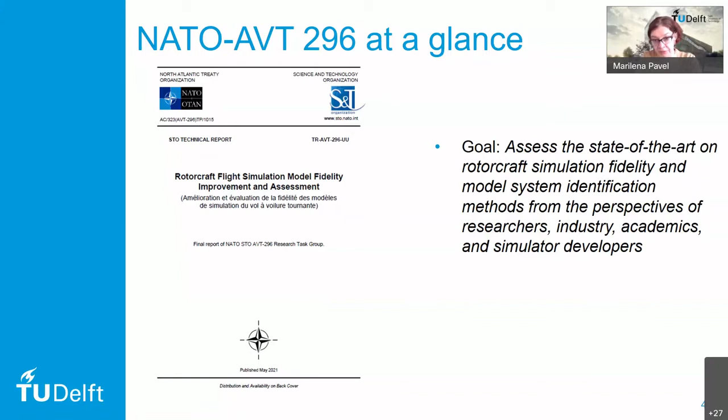Simulation fidelity: the work we did was mainly related to simulation identification, mostly in the frequency domain. We had 7 different methods, as you see in this enumeration, and a flight test database of 8 different helicopters — the Bell, the UH-60 Sikorsky, and the CH-47 were amongst them. The first 2 methods, gain time delay corrections and the black box input, were more non-physical identification methods.

The next methods, 3, 4, 5, and 6, were physics-based models — Liverpool, for example, discussed forces and moment increments based on stability derivatives. Finally, method 7, the stitch simulation, was performed by DLR and Dr. Tischler.

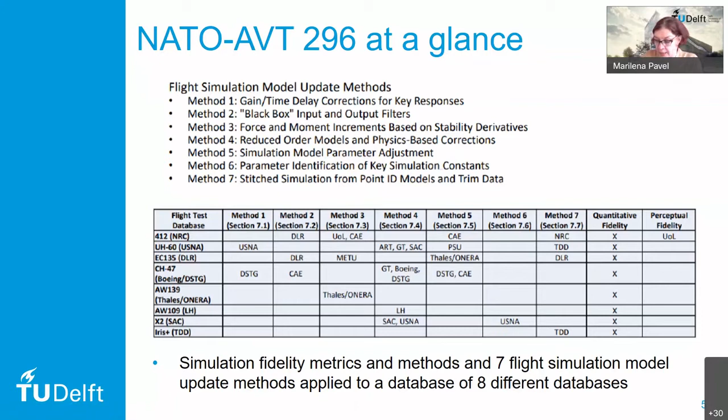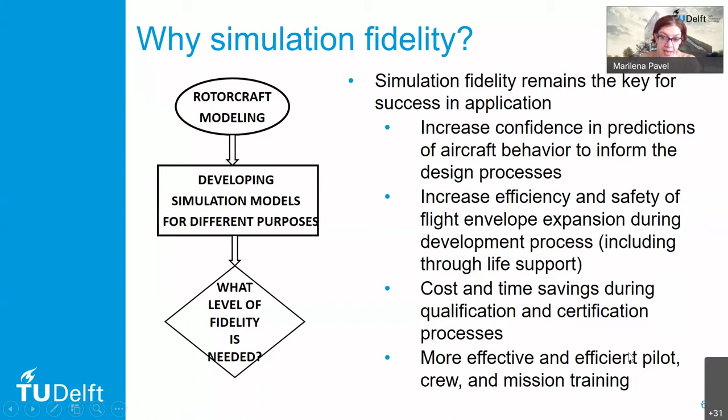So why simulation fidelity? We are modeling the rotorcraft, or the vehicle, and because of this we develop simulation models for different purposes. The first question is what level of fidelity we need. We need simulation fidelity to increase confidence in our predictions, to inform the design process, but also to extend the safety and flight envelope expansion. We need it to reduce costs and save time, and of course for more effective and efficient pilot and crew mission training.

When we go to the simulated world, we can say that according to the task being performed, the pilot is trying to simulate, to fly in a simulator, a certain task. So the first thing is that in a simulator we are performing according to a certain task.

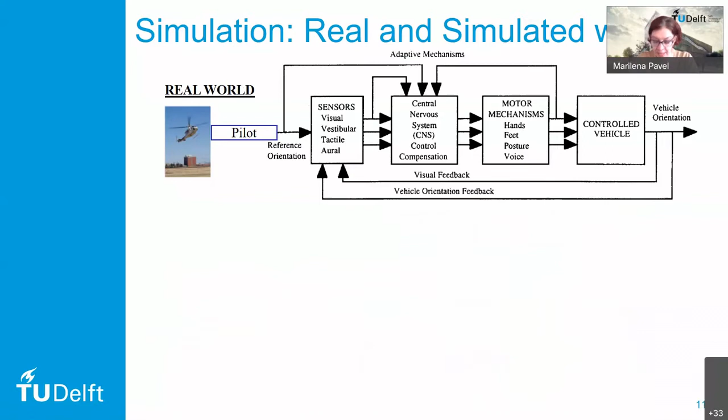And finally, we can discuss the behavioral fidelity, which is an integrated effect between the subjective and the objective fidelity.

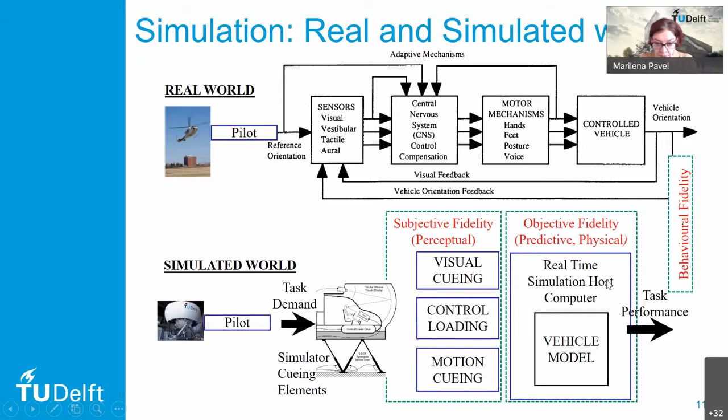I would like to underline that in the fixed wing world, there are more definitions of fidelity. We work as well with the so-called environmental fidelity and the equipment fidelity. The environmental are the cues due to flight, and the equipment are the cues due to the simulation hardware.

There must be a trade-off between the environmental cue fidelity and the equipment cue fidelity. So in a training simulator, we have a high level of environmental cue fidelity and equipment cue fidelity. For research simulators, which can be used for assessing new designs, we can think of a high environmental cue fidelity and less equipment cue fidelity.

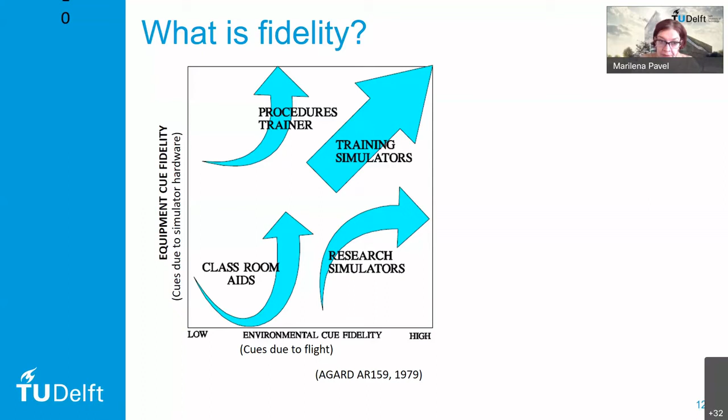The procedures trainer can be used for training pilots. Here we need lower environmental cues, but higher equipment cues.

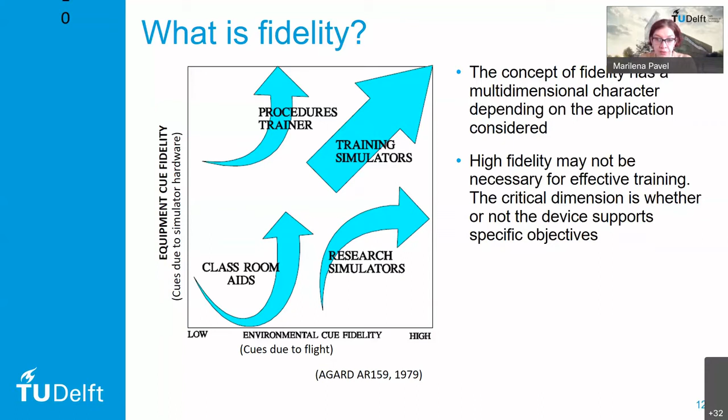So the concept of fidelity has a multidimensional character, and it depends on the application we are considering. High fidelity may not be necessary for effective training. The critical dimension here is whether or not the device supports the specific objectives.

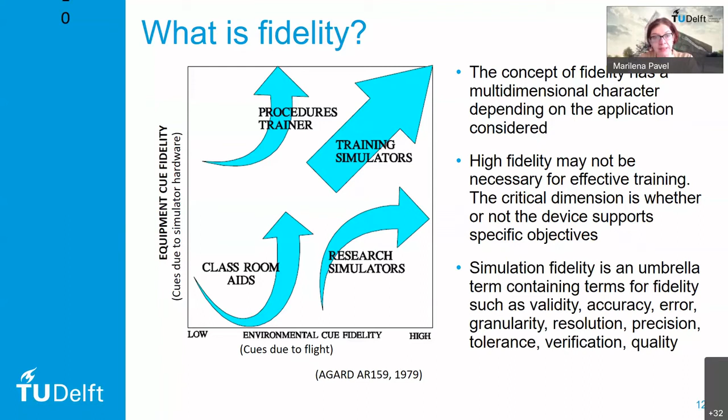The simulation fidelity is actually an umbrella of terms which contain many terms like validity, accuracy, error, granularity, resolution, precision, tolerance, verification, and quality. So fidelity is quite a challenge to think of.

In the fixed wing world as well, there was a working group on Fidelity Implementation Study, and they realized that going from the reality to the model, one needs to have one step in between, the so-called referent. They say that the referent is an entity or a collection of entities and conditions together with their attributes and behavior, which are present in a given domain.

It is said that trying to assess the fidelity straight related to the reality would be too intricate a solution. This is why we need to go to this kind of referent term. Using the concept of referent, we can simplify the fidelity measurements and go through that to assess the reality.

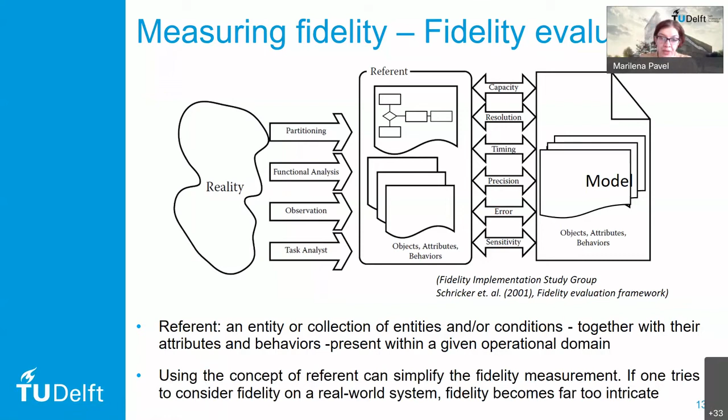Going on to simulation motion perception, we had in the NATO group a special section dedicated to motion perception. Why? Because motion is a kind of holy grail for simulation fidelity.

We all know that we assess the motion, we perceive the motion with our vestibular system, which is formed by the semicircular canals, which sense angular acceleration, and the otoliths, which detect translational acceleration.

One should think about how important motion perception is. This question came up in the group already.

One should understand that from an experiment in Simona, the simulator in Delft, we understood that motion perception has a lead with respect to the perception of the visual.

So what you see here is the roll rate in an experiment, and the continuous line is the stimulus, the roll rate. You see here the semicircular canal response and the visual channel response. So contrary to what we think, the first thing pilots do is perceive this motion, then the visual cues. In this experiment, the lead was about 300 milliseconds.

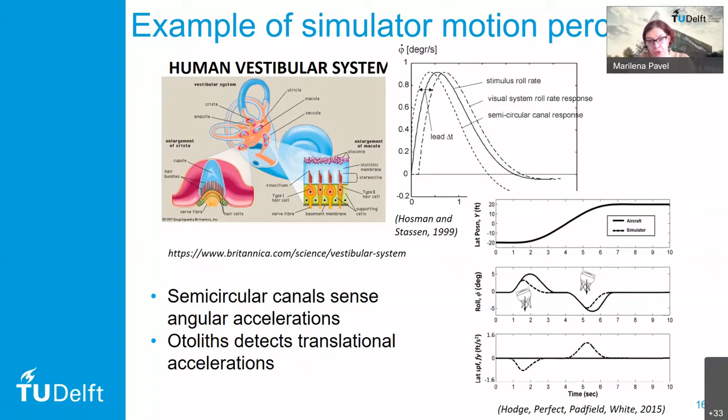So going to understand the motion tuning criteria, mostly we have criteria concerning motion. The most known are the so-called Sinacori criteria, developed in 1977 and extended in 1999 by Schroeder.

Sinacori realized that we can assess the perception of motion by analyzing the motion at 1 radian per second. And he developed a rotational gain and translational gain as a function of the phase error, across 3 different fidelities.

High fidelity, where the motion sensations are close to those of visual flight. A medium fidelity, where the motion sensations are different and noticeable, but not objectionable. And the low fidelity, where differences are noticeable and objectionable.

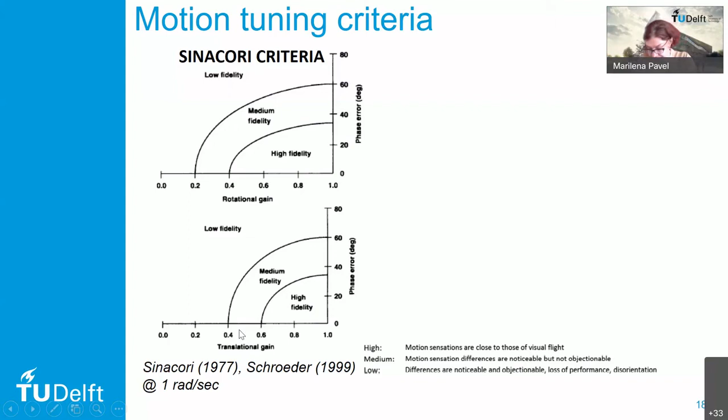It was also understood that these criteria actually have little or no support other than intuition. So they are quite subjective, but up to the present, these criteria are the most used in the research. In the fixed wing world...

there was the so-called Objective Motion Cueing Test, the OMCT, which was introduced in order to eliminate this subjective character of motion tuning. The OMCT actually excites each degree of freedom at frequencies between 0.1 up to 16 radians per second.

For example, you see an experiment in Simona where the OMCT is assessed for surge motion. The different frequency response of each degree of freedom is determined, and also in the test, the important relation between the input and the output response of the motion is determined.

The OMCT was introduced in the fixed wing world in the ICAO 9625 documents, and it is used in the present for motion tuning.

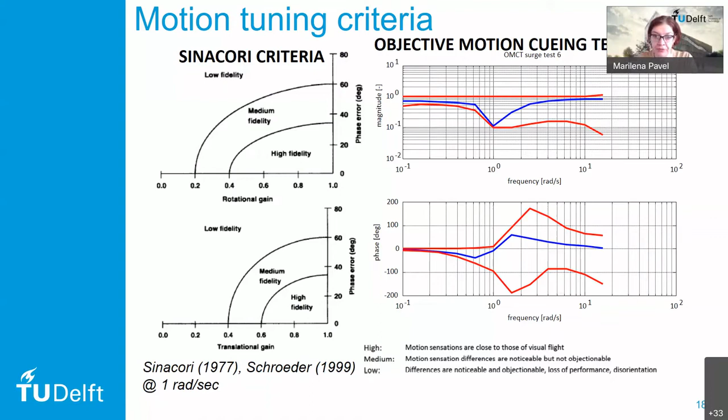Going to simulation qualification, of course we know that the FAA and EASA have the so-called objective qualification and subjective qualification. In the objective qualification, there are areas where the so-called performance tests are made, handling qualities tests, and trajectory tests.

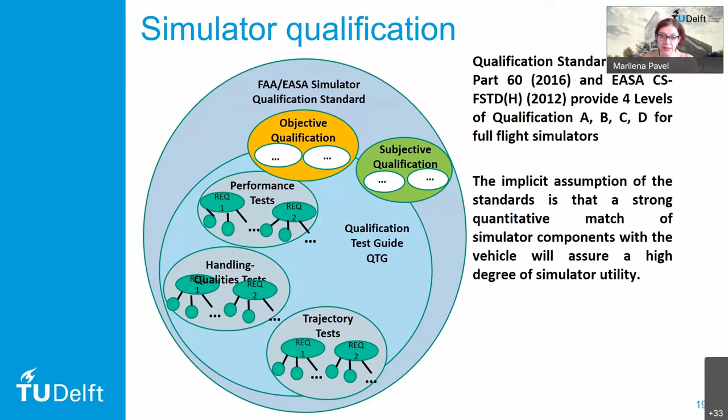Those are all qualification test guide criteria. And the implicit assumption of these standards is that a strong quantitative match of the simulator components with the vehicle will ensure a high degree of simulator utility.

Efforts in EASA are made to change this assumption, and this is, for example, in the ICAO 9625, which acknowledges that if all these are fulfilled, this still does not guarantee fidelity.

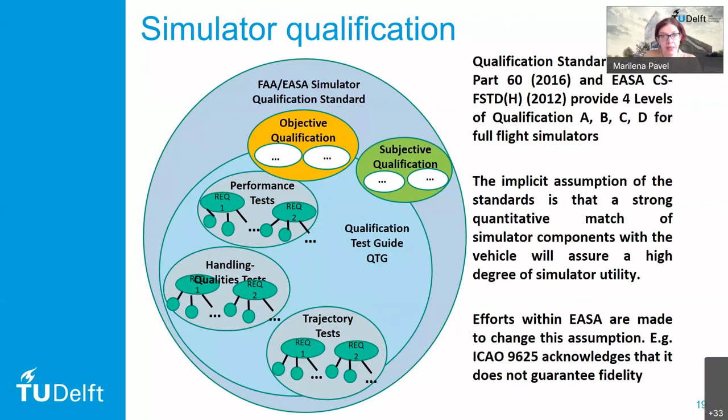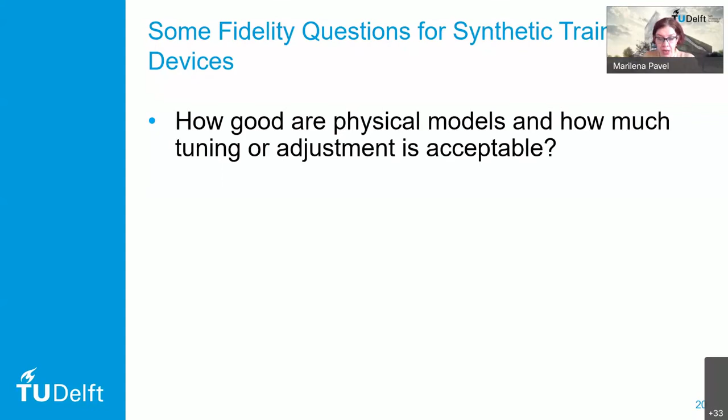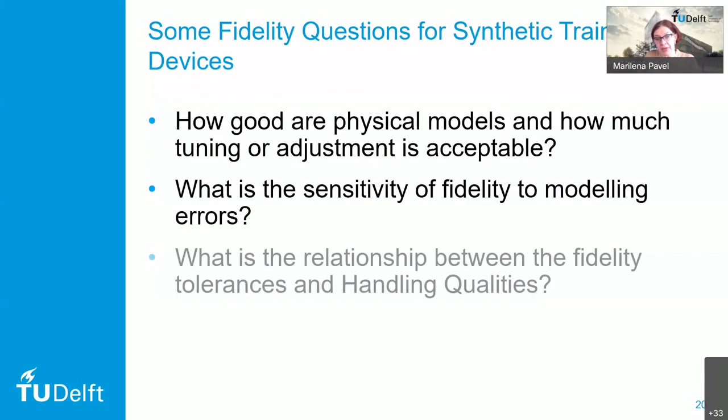So in the previous work that we have done on the fidelity question, we tried to understand how good the physical models are, and how much tuning is acceptable. What is the sensitivity of this fidelity to modeling errors? What is the relationship between fidelity, tolerances, and handling qualities? And what is the sensitivity of the pilot control strategy to this fidelity?

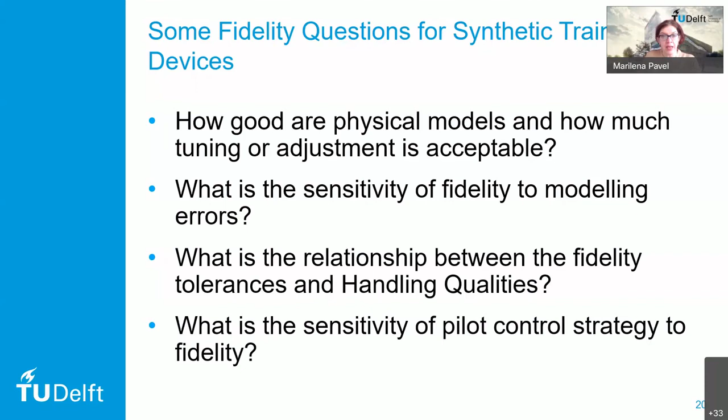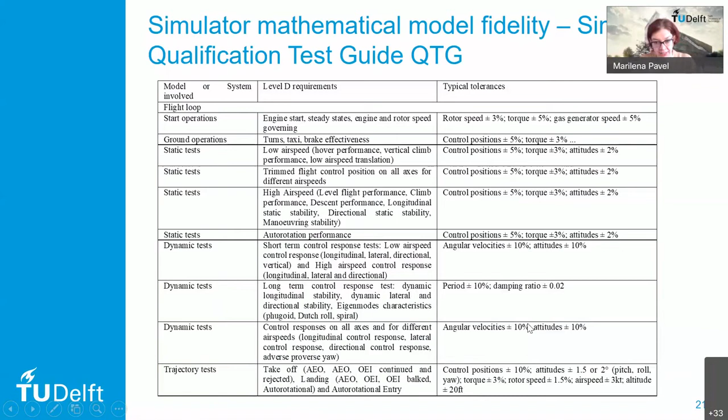The QTG, as we exemplified in the NATO report, includes the static tests, the dynamic tests, and the trajectory tests, with all the tolerances included in the qualification testing. And we have applied this to a different database.

I would like to give you an example that can be useful for this group, going back to a Garteur group that we performed on simulation fidelity.

So those QTG actually involve physical tuning, where the model is changed based on physical reasoning and can achieve 80% of the fidelity, and afterwards a non-physical adjustment, such as control gearing and feedback elements.

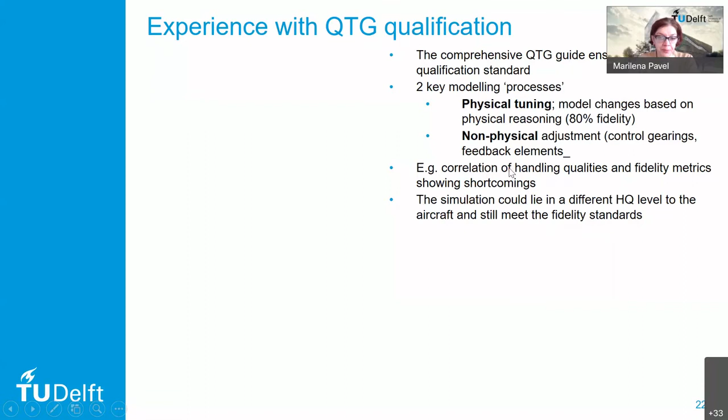And we proved, in the Garteur AG12 group led by Professor Padfield, that although we can have the model fulfilling the tolerances, the handling qualities will not lie within the fidelity standard.

This is one example we did for the longitudinal input response. What you see here is the pitch rate, the on-axis and off-axis responses, and we tried to vary derivatives belonging to this initial baseline model to find a new model which still fulfills these tolerances.

What we saw is that when we performed the bandwidth phase delay criterion, although the model was within the tolerances, the handling qualities were moving from level 1 to level 2. So the conclusion was that the simulation could have different handling qualities than the aircraft and still meet the fidelity standards.

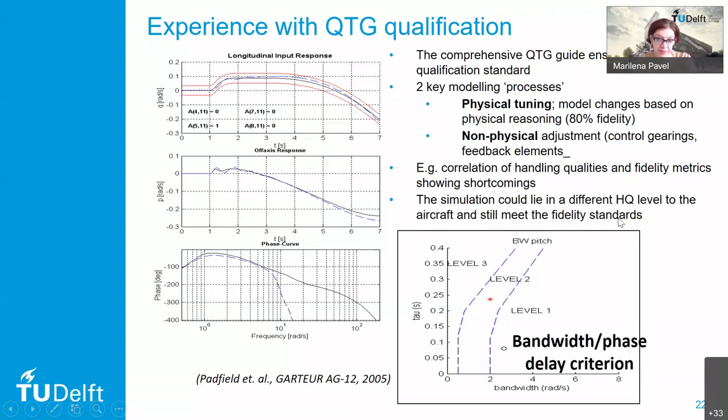Further on, we looked at work done on the Eurocopter Dauphin, the response to lateral cyclic control input, which needed a trade-off between the roll attitude and side slip matches. You see, for example, the roll attitude and the pitch rate, and the roll attitude was within the tolerances, so both were matching the tolerances.

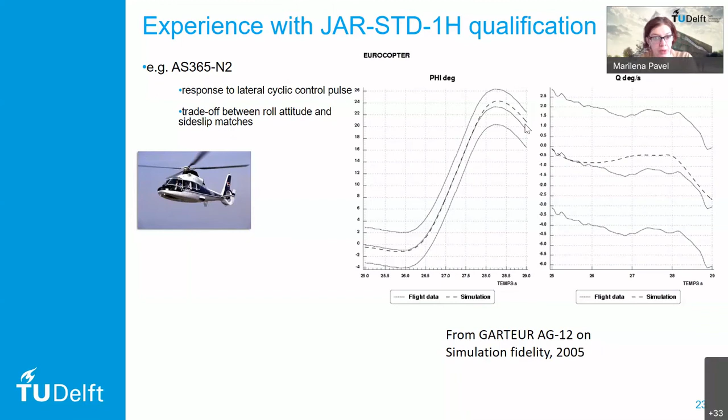If you look at some other parameters, this is the roll before the model tuning, and this is the side slip. So you see the initial model before tuning. After the physical tuning, it improved the roll and moved the model towards the tolerances, but the side slip was varying. Finally, after the model was totally tuned with non-physical adjustments, it was within tolerances, but the side slip was not according to the wishes. This shows how difficult it is, because getting one parameter within tolerances can cause another parameter to escape those tolerances. The question is whether we have good enough requirements to catch these variations.

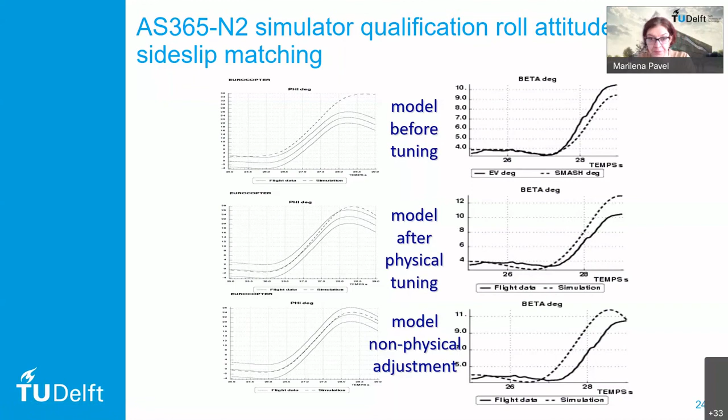In Liverpool, the project on lifting standards showed that the best approach is to integrate predictive and perceived simulator fidelity assessment. They developed a procedure to assess in parallel the perceived and the predictive fidelity. So going from the simulator requirements and according to the mission task element, one has to assess both the perceived fidelity and the predictive fidelity.

If the predicted level has differences in metrics between flight and simulation, are these differences perceived and predicted as acceptable? According to this, we go back in the loop. Only when we have both perceived and predicted fidelity can we say that we have a simulator that matches the scope we are developing.

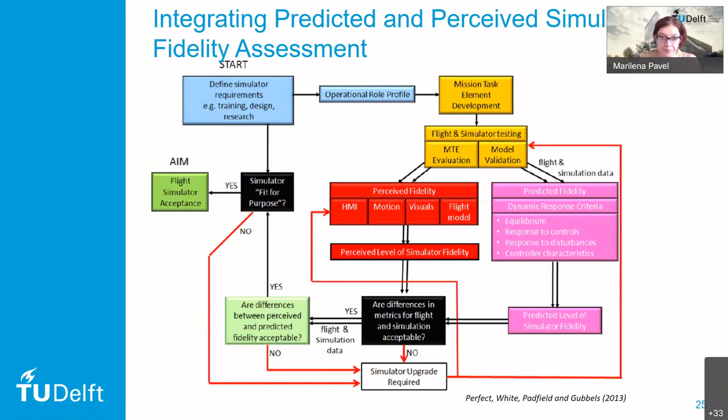The question was, what are the effects of the helicopter dynamics on autorotation training, performing transfer of training experiments? The goal was to see how we should best train pilots for learning autorotation.

There were two configurations given to the pilots. One hard configuration with high pilot intervention, where the desired performance in autorotation was achieved quite hardly. The autorotative index was varied to create a difficult-to-fly configuration and an easy configuration where low pilot intervention was needed.

What we did: the pilots who trained first on the hard configuration, the group of hard helicopter training, transferred to an easy task. Then we put them back to see the back transfer, to see how much they learned from the hard configuration.

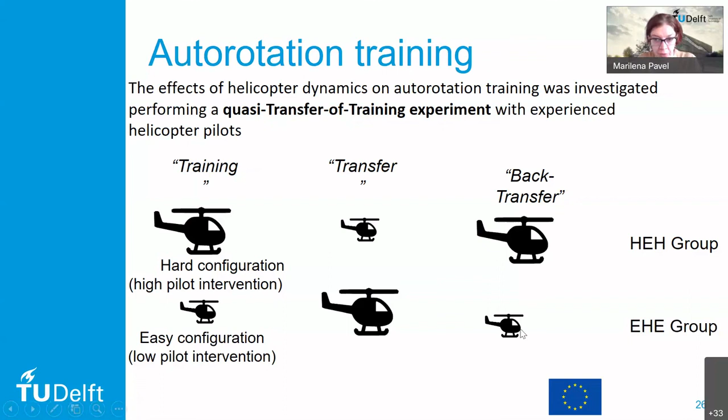For the easy configuration, the first pilots who were trained with an easy configuration afterwards went to train the hard configuration, and then they were back transferred to learn the easy configuration.

What we have seen is that for both groups, positive transfer is observed going from the hard to the easy dynamics, and not the opposite. Going from the easy dynamics to hard dynamics gave no transfer of training to the pilots.

So in order to think about the future of pilot training, we should have a methodology that gives them exactly the configurations to be trained, and also how to train novices and advanced pilots.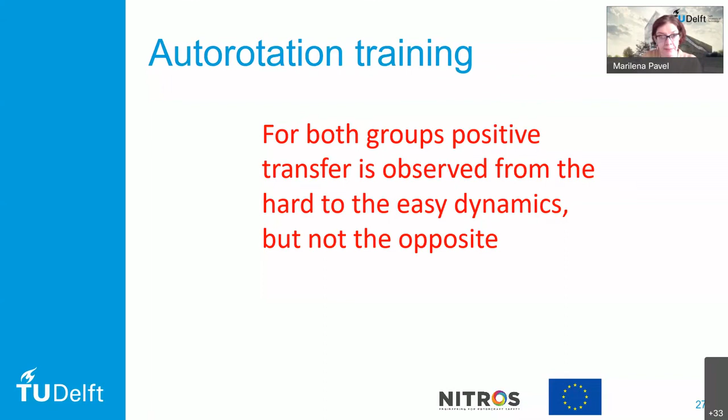So I will finish with some conclusions. The concept of fidelity has a multidimensional character, and it depends on the application. Usually the concept relates to the degree to which the characteristics of the flight simulator match the real aircraft.

The simulation certification standards still reveal shortcomings. For example, although the simulation could lie in different handling qualities, the aircraft still meets the fidelity standards. The certification standards should address both the predictive and the perceptual fidelity.